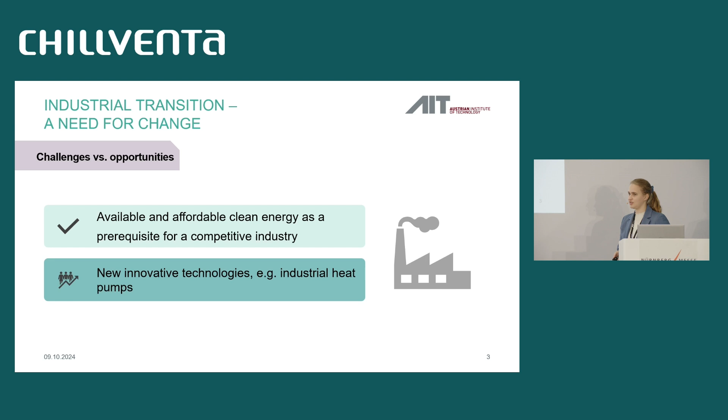Therefore, I will give you a short insight in how I look at industrial energy supply systems. One thing I always need to consider is that the industrial production site has requirements from its core process. As long as there is not enough energy to produce whatever they produce, it will not happen. Ensuring quality is a key criterion, and all cooling, heating and power demands from the production process must be fulfilled.

Furthermore, we have established technologies that might still be feasible and operated in a decarbonized way, but others might not be anymore. We have new components that can join the supply system. All this brings up various strategies for decarbonization. Just to mention a few, fuel change is a common strategy, but also electrification and heat pumps pose a big potential.

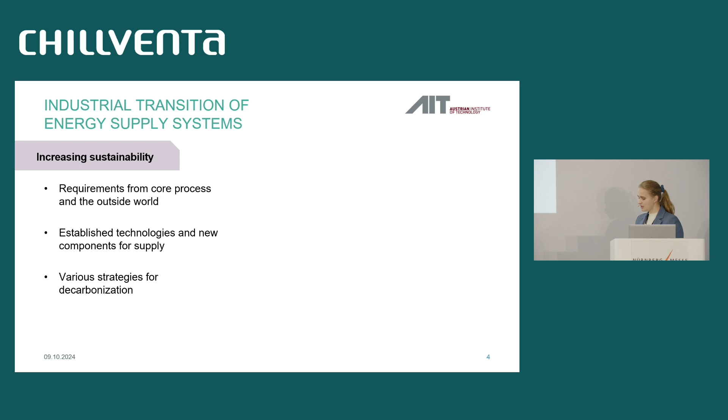I usually look at my industrial energy supply system in different layers. The most inner layer is the production process itself, with its cooling requirements, its heating requirements, temporal resolution of those requirements, and also power requirements.

Then we have on-site supply. Typical examples nowadays are combined heat and power plants, gas boilers, chillers if you need to supply cooling processes. But also heat pumps are becoming more and more an option for those energy supply on-site technologies.

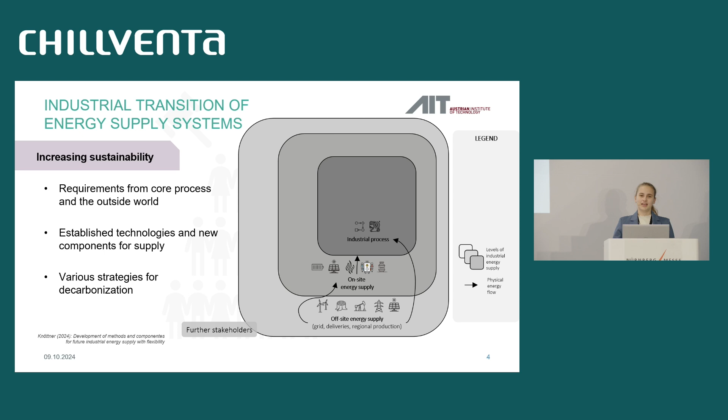Then you have the outer world, the off-site energy supply of a company, including grid connections to gas grids, to electric grids. Maybe regional renewable energy supply options need to be considered. So this is the field where I have to move and where I want to bring heat pumps into future energy supply systems which are decarbonized.

I will stick to that picture to come to the optimization applications that we're usually looking at. So maybe some background about mathematical optimization. In general, it is understood as the process of finding an optimal solution, optimal values for different variables for a defined target criterion under restrictions.

To give this a little more hands-on, what are optimal values, optimal variables? Typically, these are capacities of units or how they are operated at any point in the system. Is a unit offline or online? What are typical target criterions? Usually when we deal with industrial energy supply, the target criterion is always costs that need to be minimized. Sometimes it's maximum output, but the most common criterion is costs that are minimized.

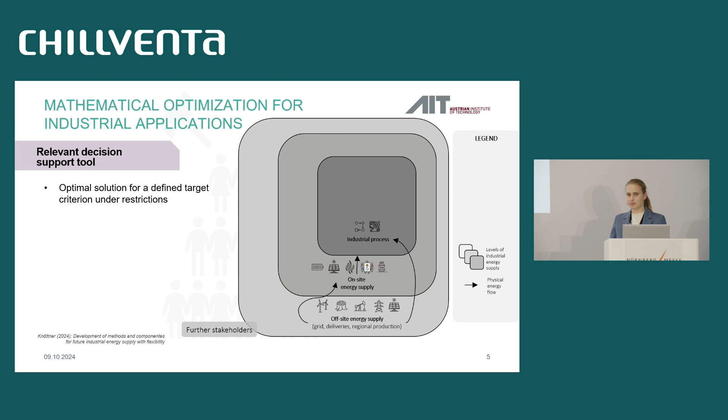The restrictions I mentioned can be technical restrictions, for instance operation ranges of heat pumps, also the operating parameters of heat pumps, but it can also cover economical or ecological constraints, such as a requested decarbonization in a system. So I can request a system to be fully decarbonized and see if the superstructure, the options of technologies that can supply my system, can fulfill that criterion.

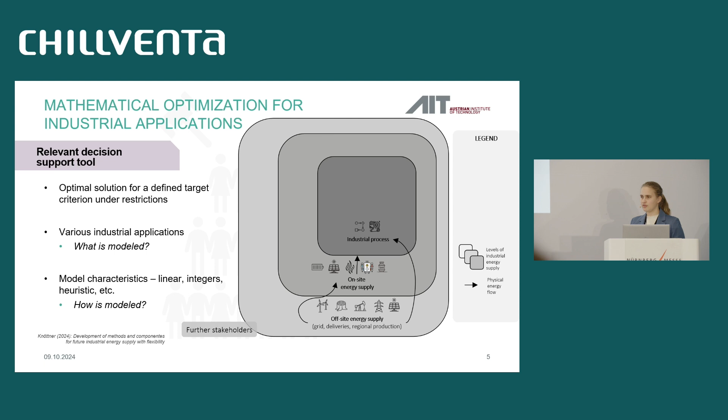What we typically distinguish as well is what is modeled, so what is the industrial application that I want to have a look in, and how is it modeled? Do I use linear equations, binary variables, or do I do it with heuristics?

I mentioned here four typical industrial optimization applications. Let's start with the one in the top left, the design optimization. In such models, I get information of how big a heat pump would be that I integrate, or also which sources and sinks should be combined.

In operation optimization, I usually get for a given system the optimal schedule for all energy supply technologies. What I often do, and what the example I have with me will later be, is the combination of design and operation optimization. Then we have the heat exchanger network synthesis, here shortened as HENS in the middle.

This is usually an extension of the pinch method, where you combine heat sources and sinks via direct heat exchangers, heat pumps, or thermal storages in a temporally resolved model. But it usually doesn't cover the outside world. So if you have fluctuating energy prices, fluctuating requests from outside, this is typically not covered in such heat exchanger network synthesis models.

Combinations of those examples shown can make sense. A fourth example is scheduling, which is usually reordering of production tasks. For today, I will not cover scheduling, but stick to design and operation optimization.

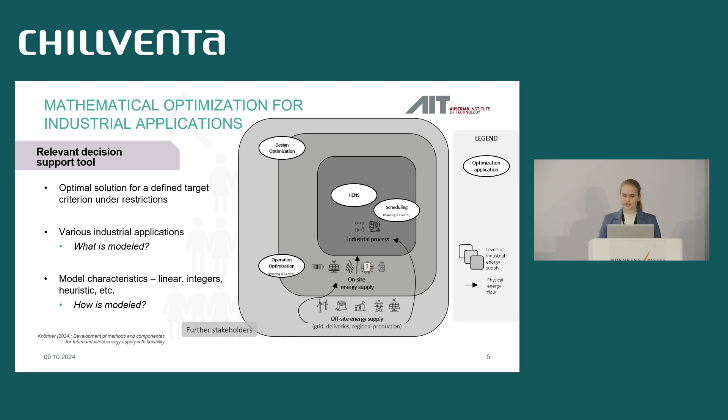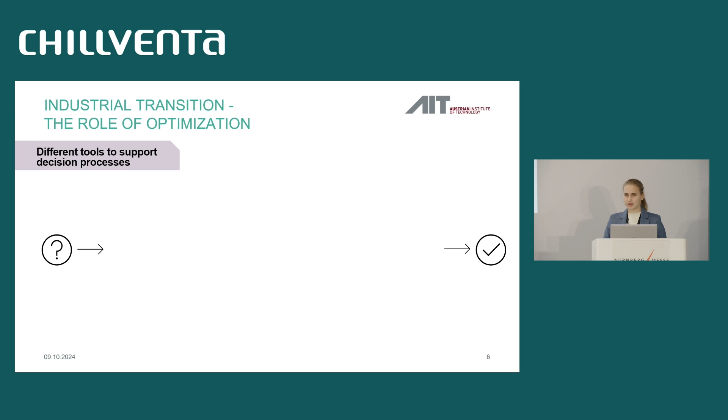I would like to show you what role it can play in going from a question - how can my decarbonized system look like - to a solution - how I will produce my energy in the next 10 years. We have different methods that we apply at AIT.

In my understanding, optimization models are always a starting point. When I have a lot of questions and options open, I would go for the optimization model, which helps support the conceptualization of the site. A big advantage of mathematical optimization is that you can consider technical, economical, and ecological aspects at the same time, answering several questions within one built model.

Once I have a good idea of what technology will be included in my model - will it be a heat pump providing hot water, or steam, or a heat pump with a mechanical vapor compressor - physical simulation models are typically the next step. There's an iterative circle between optimization and physical simulation.

What we often do is combine those two approaches in an iterative loop to improve both the optimization models and the assumptions for our physical simulation models. After that, and that's typically when our work at AIT stops, detail engineering is the next step. So what happens regarding accuracy and level of detail?

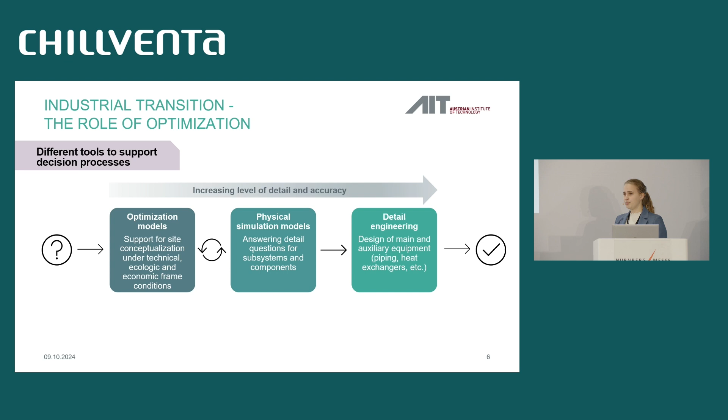Accuracy typically increases from the optimization model, which is simplified compared to the physical model and detail engineering. But the size of the considered system decreases the other way. I'll cover more details about the questions we can answer, then show you how big such a system can be in optimization models.

I brought an example from the pulp and paper sector, where we set up a comprehensive model with a lot of components. I think this best explains the increasing size of the considered system for the optimization model.

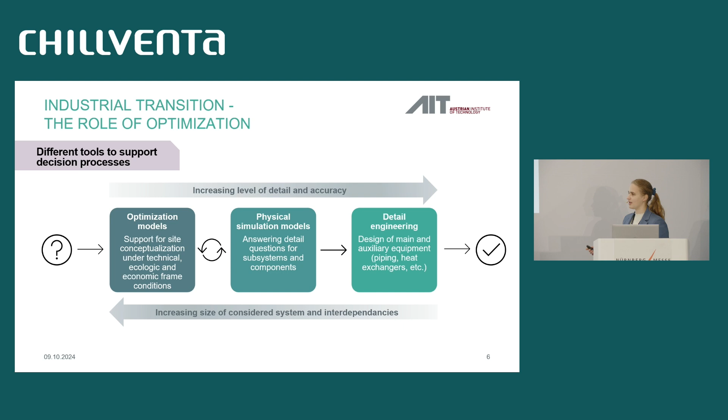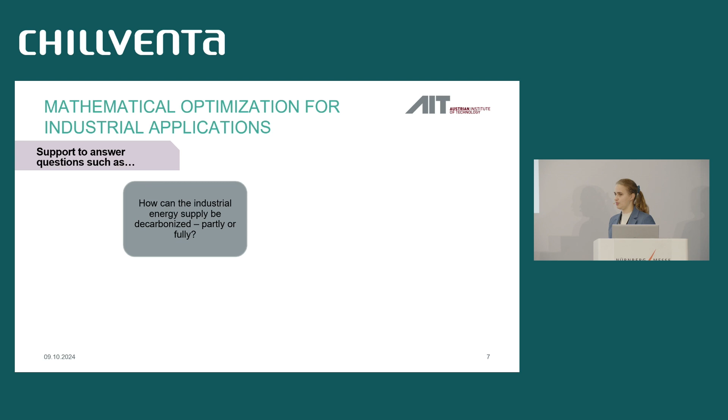Typical questions our customers ask when we start working together with industrial partners: how can industrial energy supply at my site be decarbonized? Can it be decarbonized 100%, or just part-wise? And another question - how can heat pumps contribute to that?

When I integrate one or two heat pumps, where should I integrate them? Where do they bring the most value? Where are they most efficient and most feasible? This brings me to the next questions.

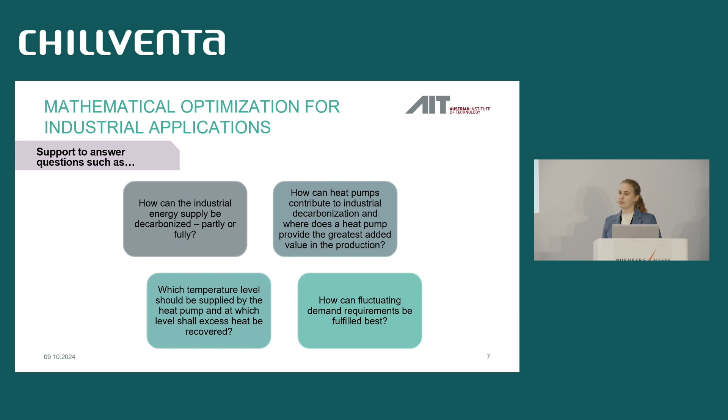People often have different sources and different sinks, and want to know how to combine them best. Also, a question that comes up in later stages: how can heat pumps fulfill my flexibility or fluctuating demands? How flexible is the new energy system with heat pumps compared to the old one? Can I fulfill all the requests I have?

This is typically a pure operation optimization example, but within the whole chain, we often combine design and operation optimization to answer those questions, typically with one exhaustive model.

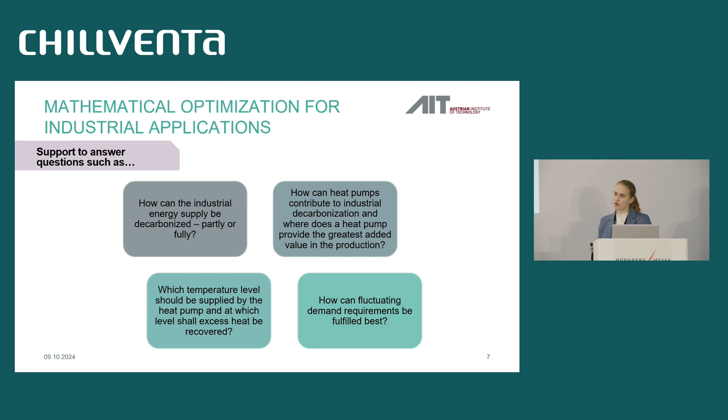All components have technical constraints, with inputs and outputs where I can connect them. The drawback is that you need a lot of experience to apply such models. We had a project with 5 industrial partners from the pulp and paper sector, and we brainstormed with them to come up with an exhaustive list of their supply options for energy sources.

We have processes that can be parameterized to represent paper machines with electricity and steam demand, but also wood grinders with pure electricity demand. What we often have is that the pulp and paper sector is not just an energy consumer, but also a producer.

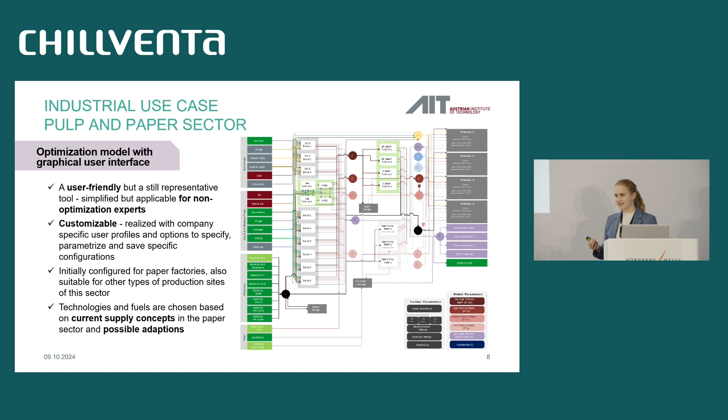What is the outcome of that model that we have here in the back end regarding heat pumps? So what are the insights? We found that when heat pumps are integrated, they're typically substituting CHP plants in this sector, which often brings a problem: the energy provision on-site, the electricity and steam provision on-site, is switched to an electricity consumption from outside.

So this sector actually sees a lot of organizational and cultural changes when it comes to heat pump integration. We also found that there might be economic frame conditions where the heat pump integration can be driven just by economics. Actually, we don't see them yet in Austria, nor in Germany, I would say.

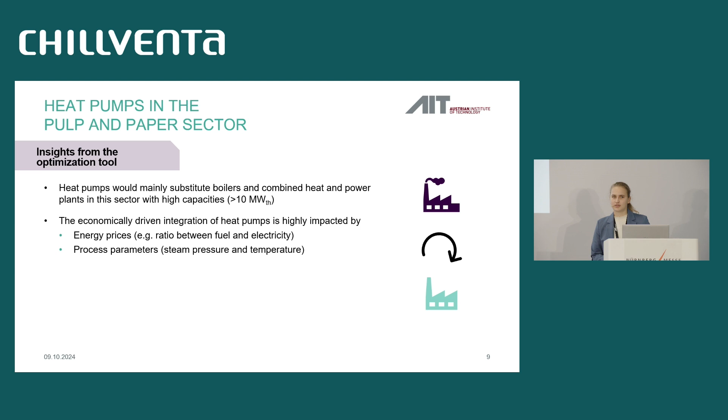But the energy price, especially the ratio between the fossil fuels they use now and the electricity, is a high driver of whether it is economically feasible or not, along with the process parameters. So actually, the adaptation of steam temperatures and pressures that are requested can really support the integration of high-temperature heat pumps, steam-providing heat pumps, in that sector.

However, economics are still an issue, but if you request decarbonization in a model, then you see that heat pumps are really among the top technologies that provide the system in a most cost-efficient way. So if we have the following two frame conditions, heat pumps are typically the most cost-efficient decarbonization solution.

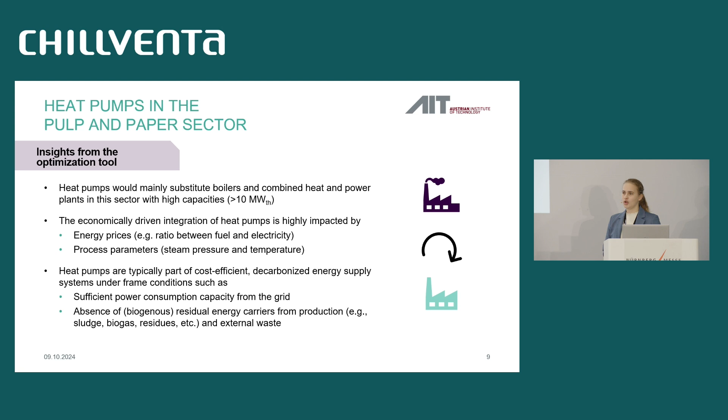First, a sufficient capacity and connection to the electric grid. And second, the absence of biogenic residues. So depending on the type of sector, you might have a lot of biogas, sludge, reject that you can use as an energy carrier. In that case, the heat pump is also good, but not as feasible as such residual boilers. But still, heat pumps will be for sure an option in the future in the pulp and paper sector.

I brought some more really short examples from other sectors. So I talked already about pulp and paper. Typical sources we have there are wastewater, humid air, and we need steam. So we have high temperatures, but we showed in our models that we can reduce the CO2 even up to 100% and reduce primary energy consumption up to 60%.

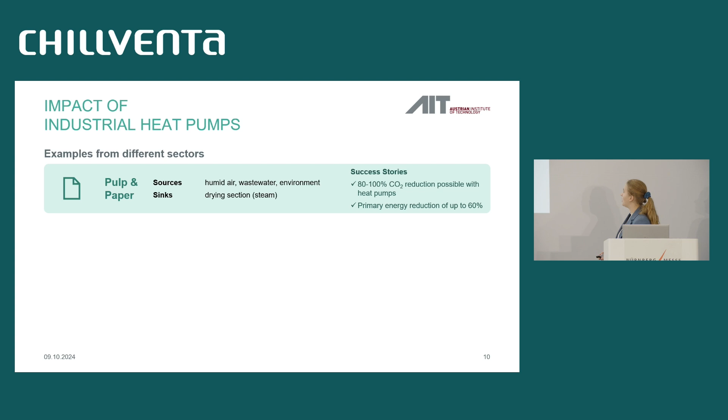Furthermore, for the food sector, we had a similar project, and we found that there we have different sources. We have typically wastewater, but also excess heat from chillers. And we have lower temperatures regarding the sinks, so we also have cooking processes below 100 degrees. There we found, in a project for a specific site, up to 50% CO2 reduction possible, with a payback period between 7 and 8 years for industrial heat pumps.

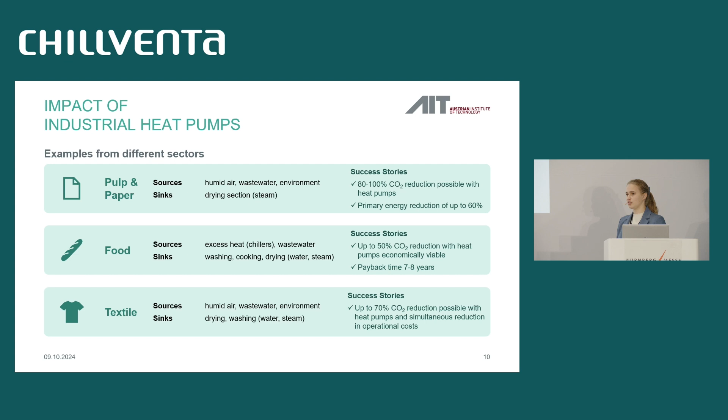And the third example I brought is the textile sector. Sources and sinks are similar actually to pulp and paper. However, they also have washing processes, which makes it a little easier. And we found there that up to 70% CO2 reduction was possible, while the operating costs could be reduced.

So what can I summarize? I just showed you an example of how such models can look like and how heat pumps could be integrated in the pulp and paper sector. But in general, that method is applicable also to other sectors.

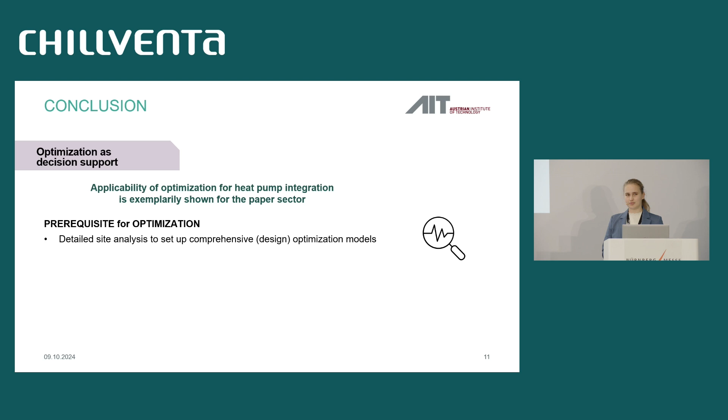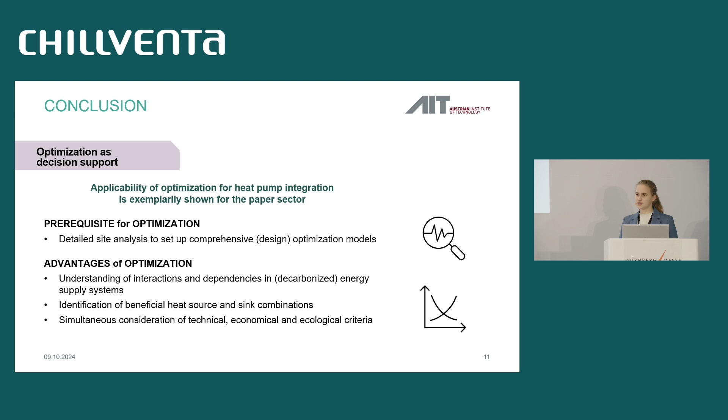Something that we need for the optimization - I think you remember the big picture with a lot of possibilities, a lot of technologies - we need a really good comprehensive analysis of the site beforehand. But if we have that, we can get the following advantages: we understand what are the interactions and the dependencies in decarbonized systems, we can identify beneficial combinations of heat sources and sinks, and - for me, a really big thing - we can simultaneously consider technical, ecological, and economic aspects.

So for now, I'm finished. I'll be happy to answer your questions.